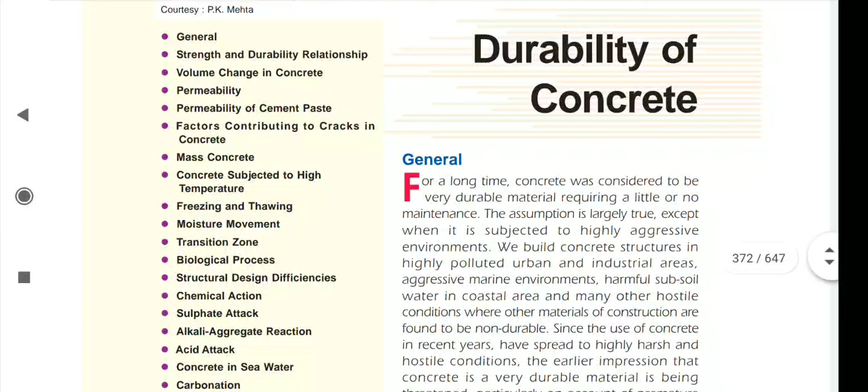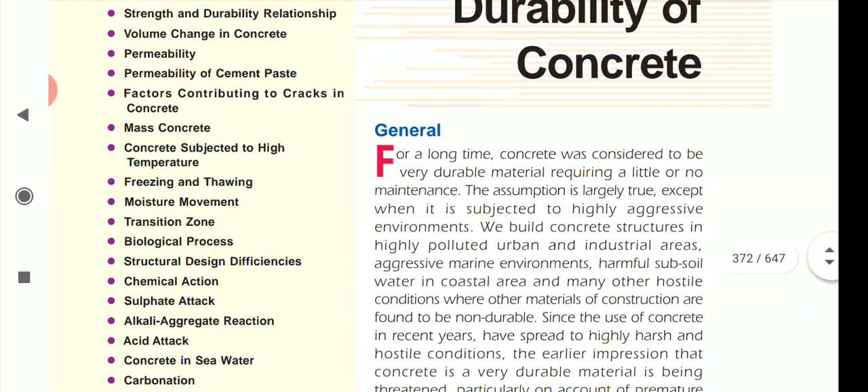Welcome you all for the next session of concrete technology, and that is the durability of concrete. This is from the topic of the third module. We'll study what is meant by durability and what are the factors which are affecting durability.

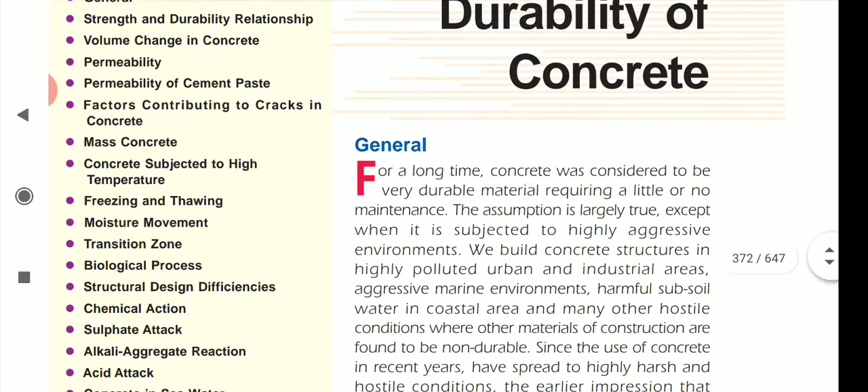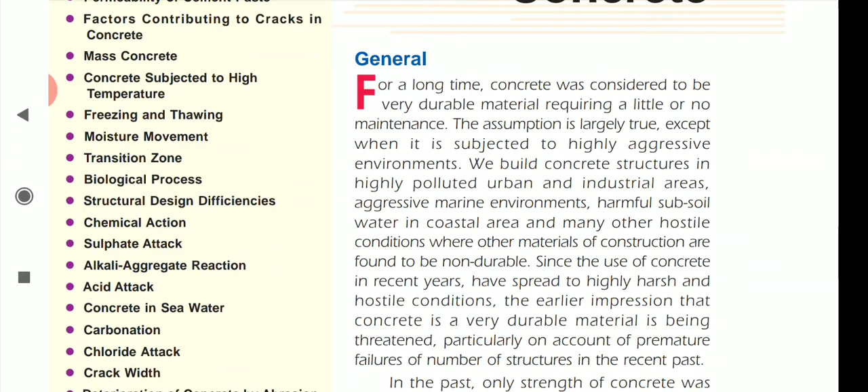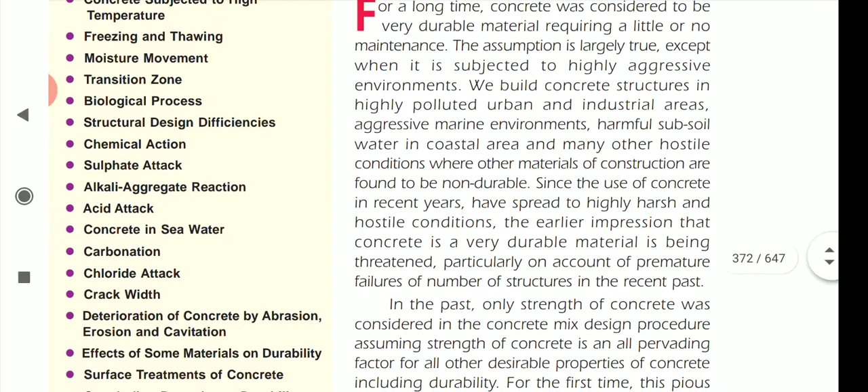For a long time concrete was considered to be a very durable material requiring little or no maintenance. This assumption is largely true except when it is subjected to a highly aggressive environment, such as when we build concrete structures in highly polluted urban and industrial areas, aggressive marine environments, or harmful subsoil water in coastal areas.

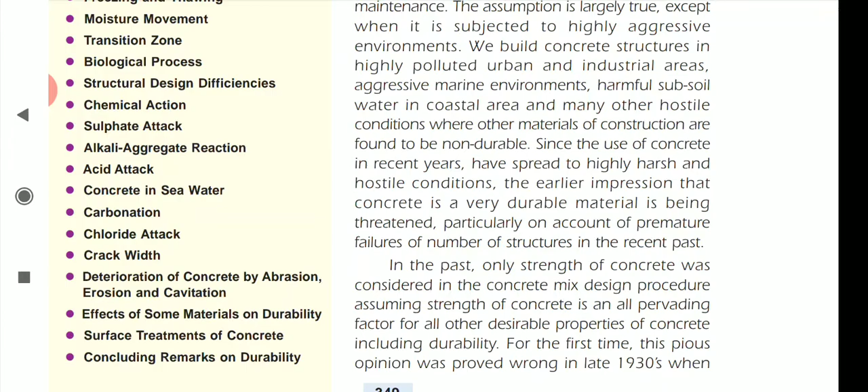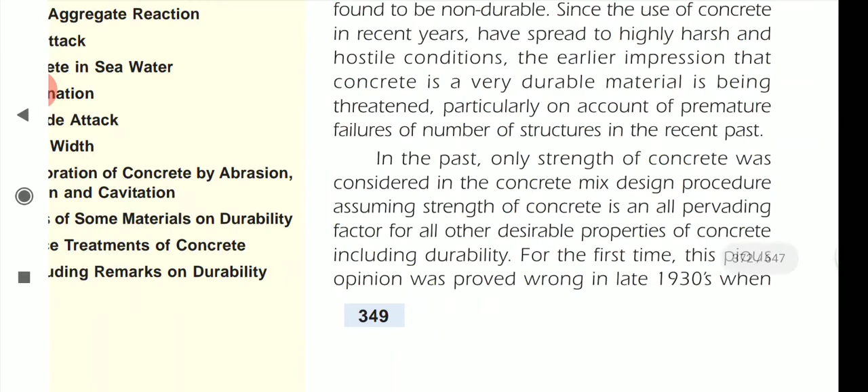Since the use of concrete in recent years has spread to highly harsh and hostile conditions, the earlier impression that concrete is a very durable material is being threatened, particularly on account of premature failure of a number of structures. In the past, only the strength of concrete was considered in the mix design procedure, assuming strength is an all-pervading factor for all other desirable properties, including durability.

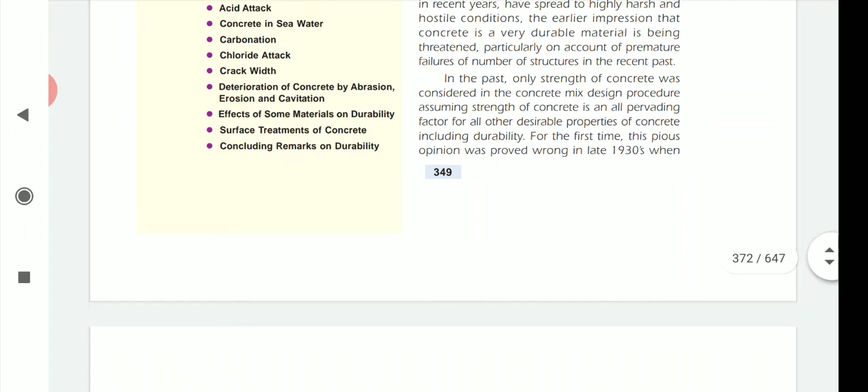This opinion was first proved wrong in the late 1930s when a series of failures of concrete pavements took place due to frost attack. Although compressive strength is a measure of durability to a great extent, it is not entirely true that strong concrete is always durable concrete.

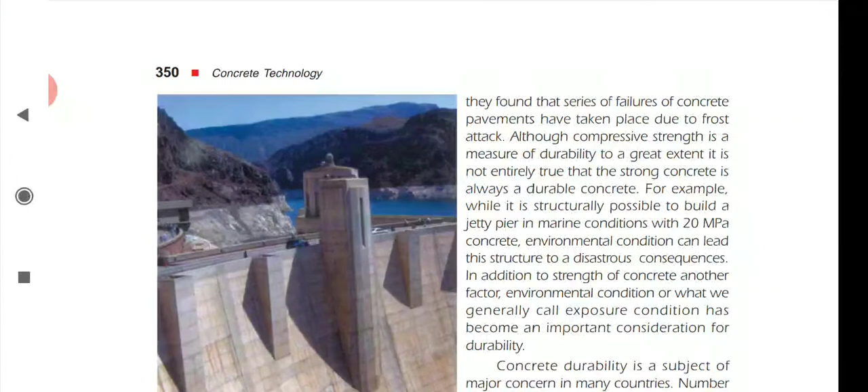For example, while it is structurally possible to build a jetty pier in marine conditions with 20 megapascal concrete, the environmental condition can lead this structure into disastrous consequences. In addition to strength, another factor, the environmental condition or exposure condition, has become an important consideration for durability.

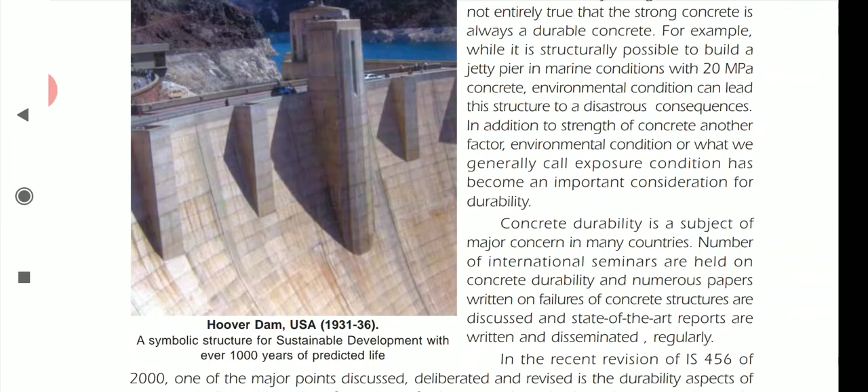In olden days, we considered strength and durability to be the same. If concrete achieved good strength, we would say it is durable concrete. But this is not true. Some environmental conditions, when not favoring the concrete, cause durability to reduce even if it has sufficient strength.

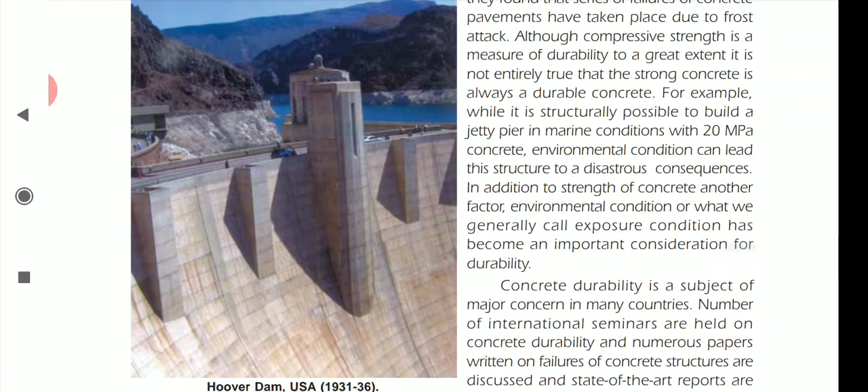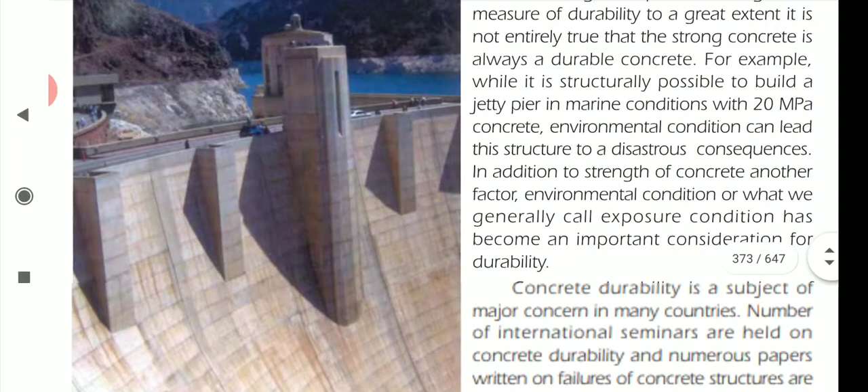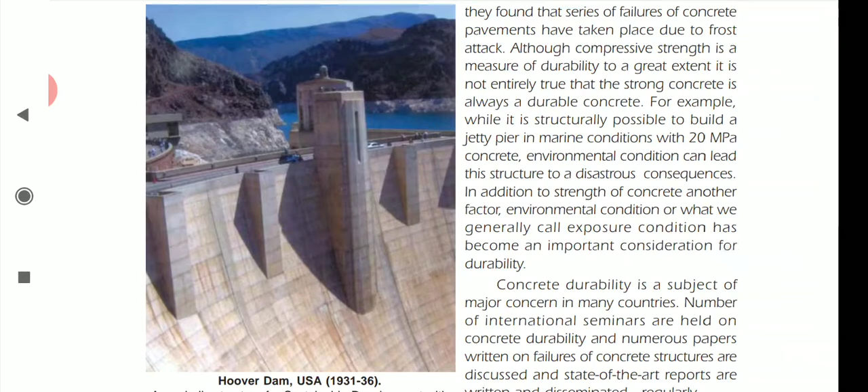The factors affecting durability are different from the factors affecting strength. Concrete having good compressive strength may have less durability. Durability is like the living span of concrete, in normal words, how many days the concrete remains durable - that we need to study.

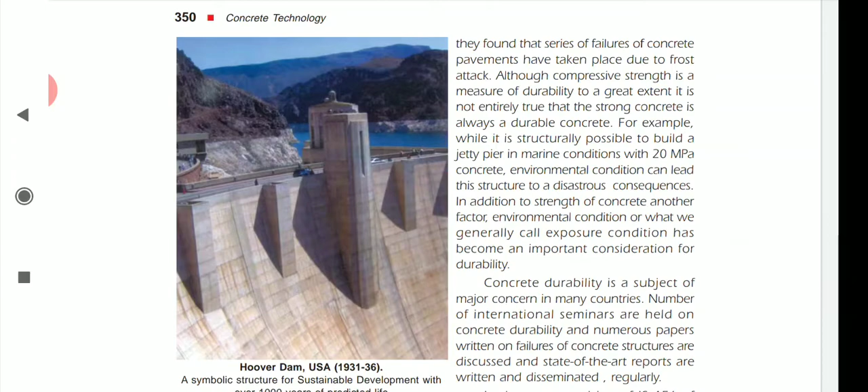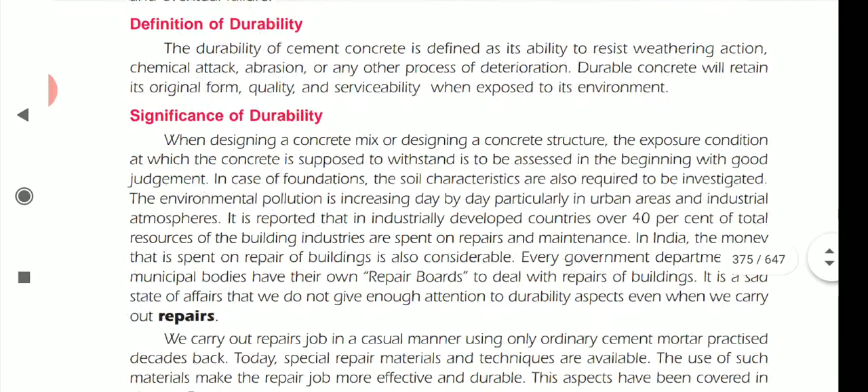So what is the significance of durability, why we need to consider durability in the construction of a concrete structure - that we'll see. That is the definition and significance of durability. The durability of cement concrete is defined as its ability to resist weathering action, chemical attack, abrasion, or any other process of deterioration.

A durable concrete will retain its original form, quality, and serviceability when it is exposed to the environment. Durability is the resistance capacity of concrete, or its ability to resist environmental conditions like chemical attack.

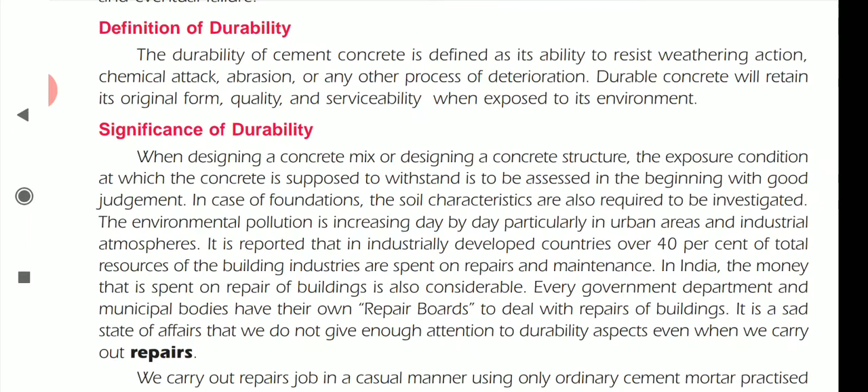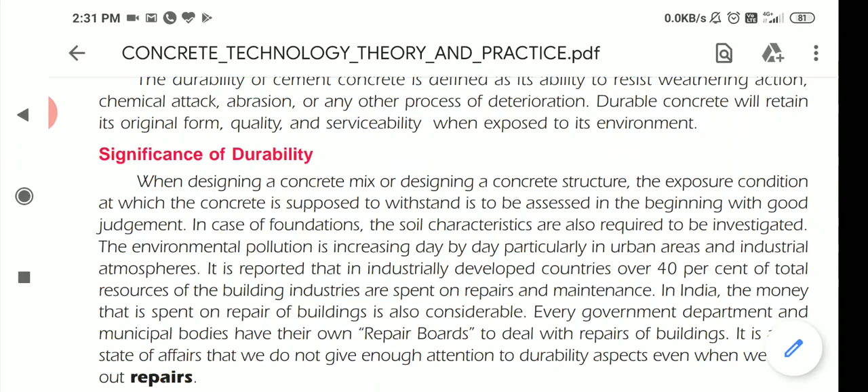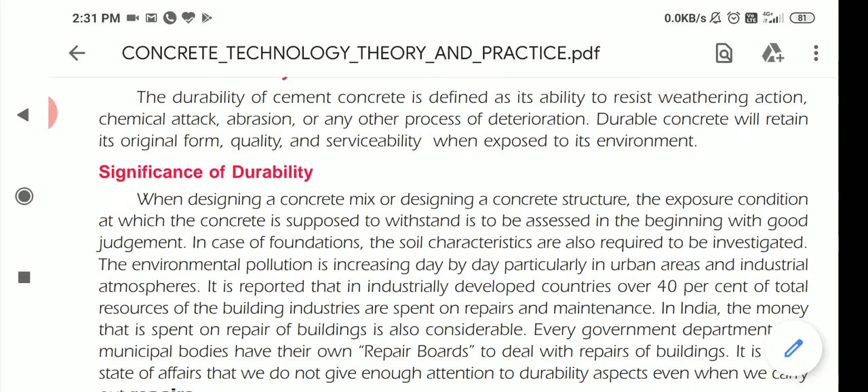Chemical attack comes from environmental pollution, and abrasion is the rubbing action between two items, along with any other process of deterioration. If concrete has resistivity capacity against these factors, then I can call it durable concrete. If concrete fails to resist chemical attack, then I cannot say it is durable. So if you want to say concrete is durable, it should resist natural or environmental effects, and will always retain its original form, quality, and serviceability when exposed to the environment.

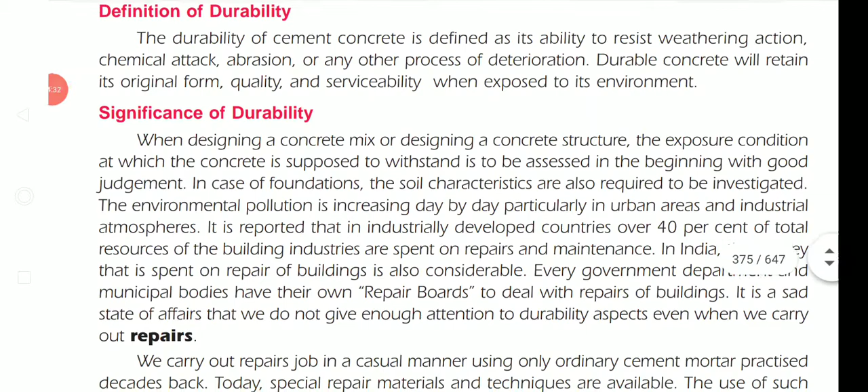What is the significance of durability? Significance means why we need to consider it, what is the importance of durability. When designing a concrete mix or a concrete structure, the exposure condition which the concrete is supposed to withstand must be assessed in the beginning with good judgment. In case of foundations, the soil characteristics are required to be investigated.

The environmental pollution is increasing day by day, particularly in urban areas and in industrial atmosphere.

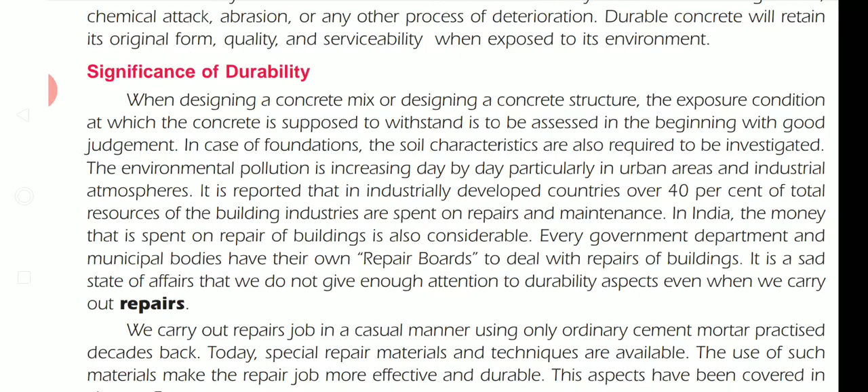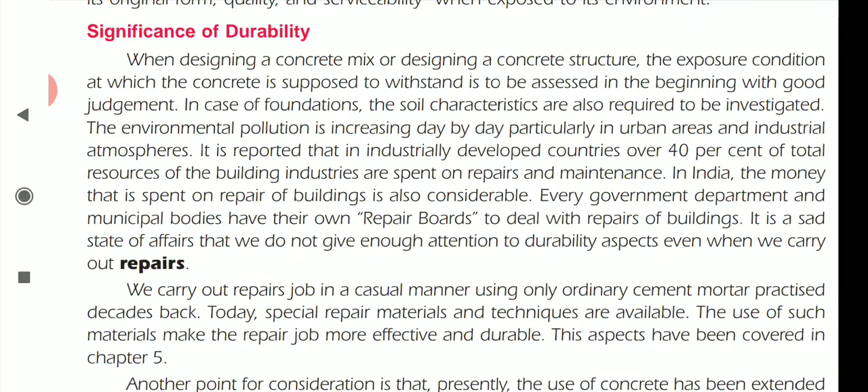It is reported that in industrially developed countries, over 40% of the total resources of the building industries are spent on repairs and maintenance. In India, the money spent on repair of buildings is also considerable. Every government department and municipal body has its own repair boards to deal with repair of buildings. It is a sad state of affairs that we do not give enough attention to durability aspects when we carry out repairs.

We carry out repair jobs in a casual manner using only the ordinary cement mortar practiced from long back. Today, special repair materials and techniques are available. The use of such materials makes the repair job more effective and durable. These aspects have been covered in chapter 5.

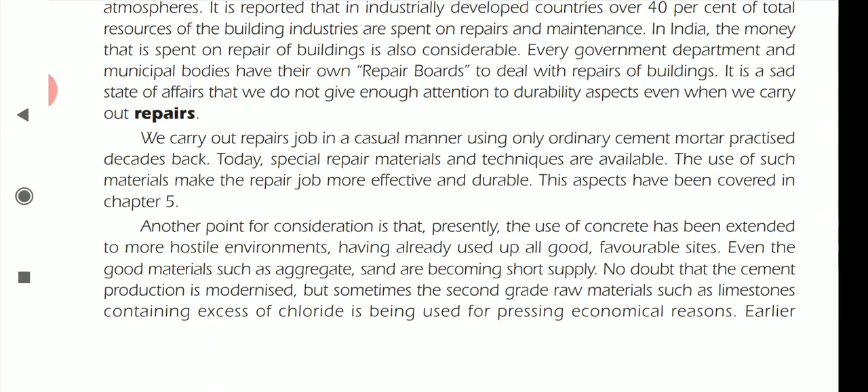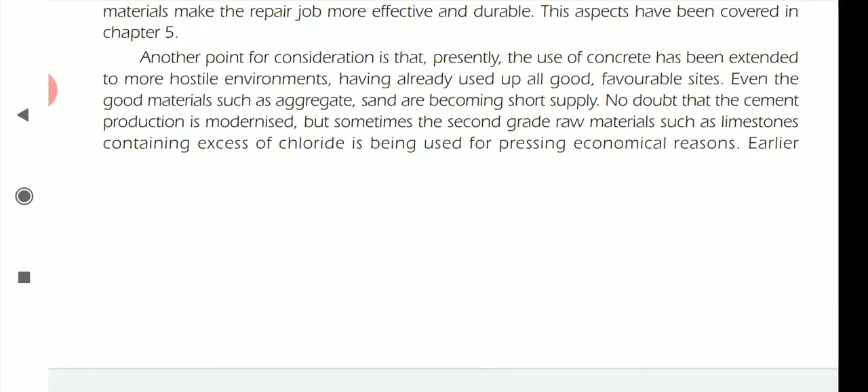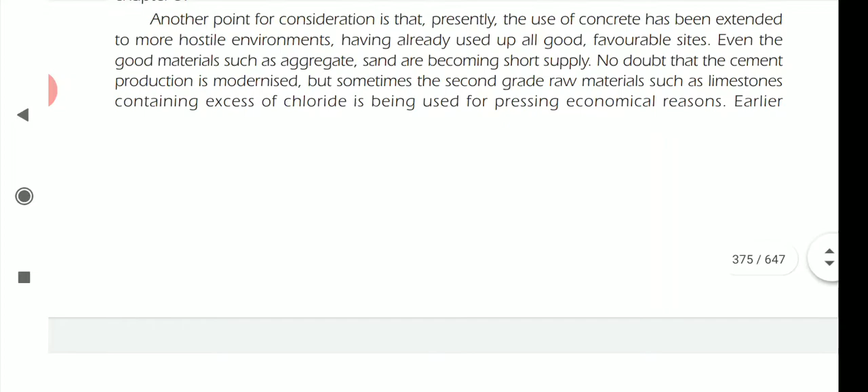Another point of consideration is that presently the use of concrete has been extended to more hostile environments. Having already used up all good favorable sites, even good materials such as aggregate and sand are becoming short in supply. No doubt that cement production is modernized, but sometimes second grade raw materials such as limestone containing excess chloride is being used for economical reasons.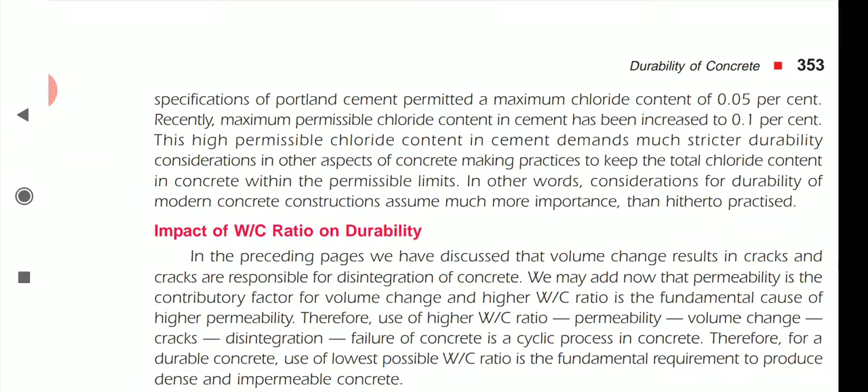Recently, the maximum permissible chloride content in cement has been increased to 0.1%. This high permissible chloride content in cement demands much stricter durability considerations in the other aspects of concrete making practices, to keep the total chloride content in concrete within permissible limits. In other words, consideration for durability of modern concrete construction assumes much more importance than hitherto practiced.

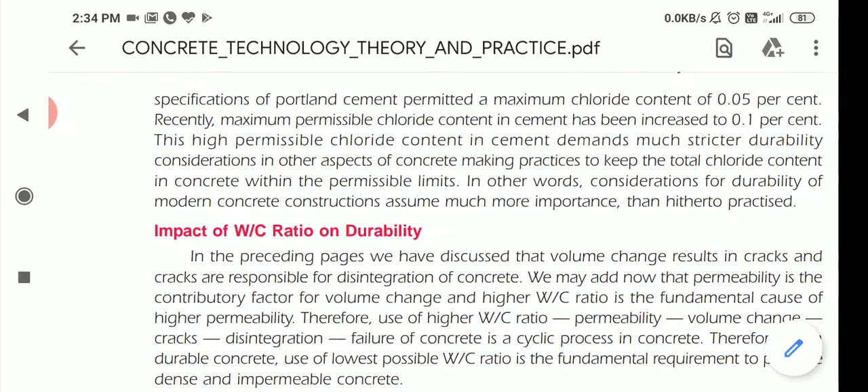So as we know, why we need to consider durability is because the concrete is going to be subjected to different hostile conditions or environments, like industries and different types of environmental pollution. When the chemicals present in that pollution attack the cement, the durability of the concrete reduces. When durability reduces, there is occurrence of cracks and collapse of buildings. So you need to construct buildings that can resist that chemical attack, and then that concrete can be called a durable concrete.

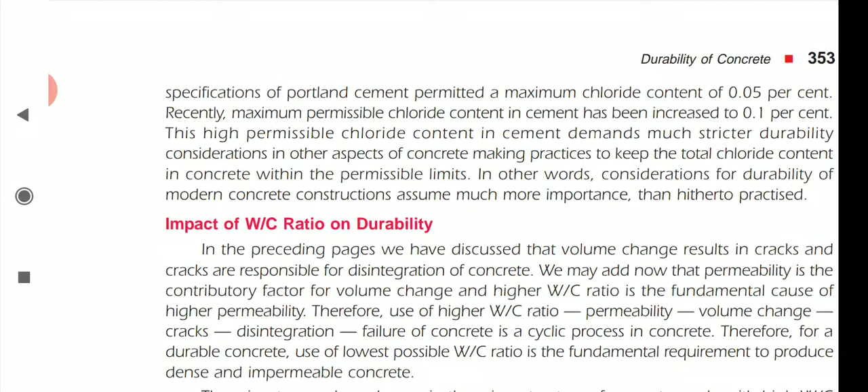So what are the different factors which are affecting this durability? If you want your concrete to be durable for longer days, how do you need to prepare that concrete? What are the factors to be considered while preparing concrete for a durable one?

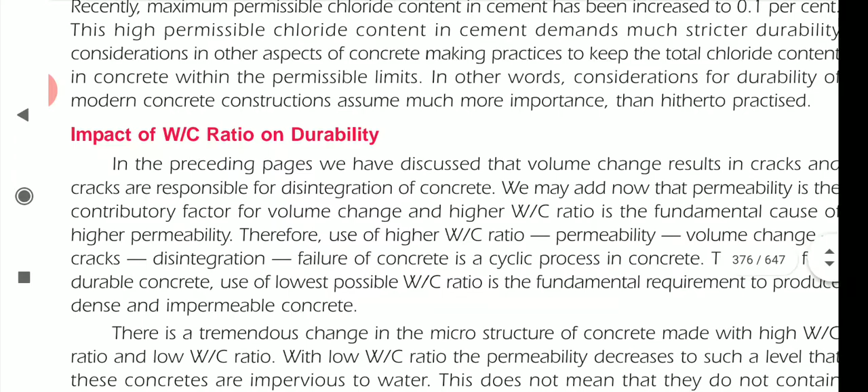The first one is water cement ratio. As we know, the water cement ratio is an important factor for volume change, and higher water cement ratio is the fundamental cause of higher permeability. Yes, true. If the water cement ratio is higher, the permeability will be higher. It will flow faster. Therefore, use of higher water cement ratio causes permeability, and it causes volume change, cracks, disintegration, failure of concrete.

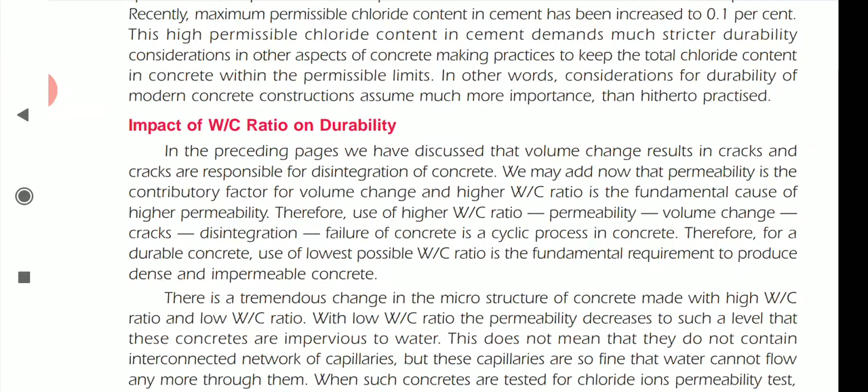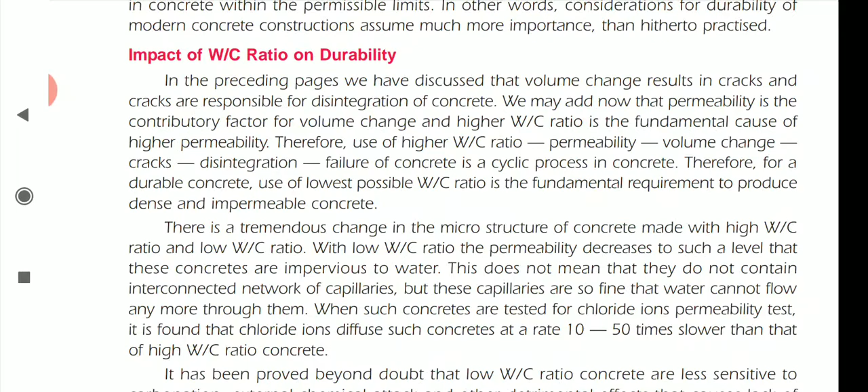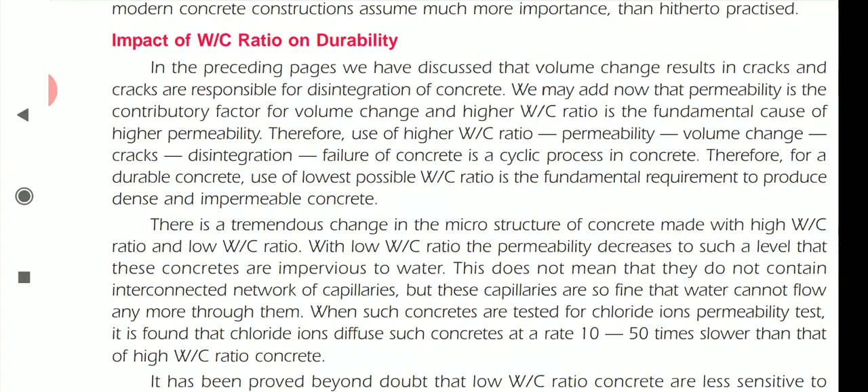It is a cyclic process for durability. Therefore, for durable concrete, use of the lowest water cement ratio is fundamentally required to produce dense and impermeable concrete. So if you want to get dense and durable concrete, the water cement ratio should be less. The more the water cement ratio, the more will be the permeability. The more the permeability, the more will be the volume change, that is shrinkage, which causes cracks. More cracks lead to disintegration and collapse. Hence the durability gets reduced, so you should use a lesser water cement ratio.

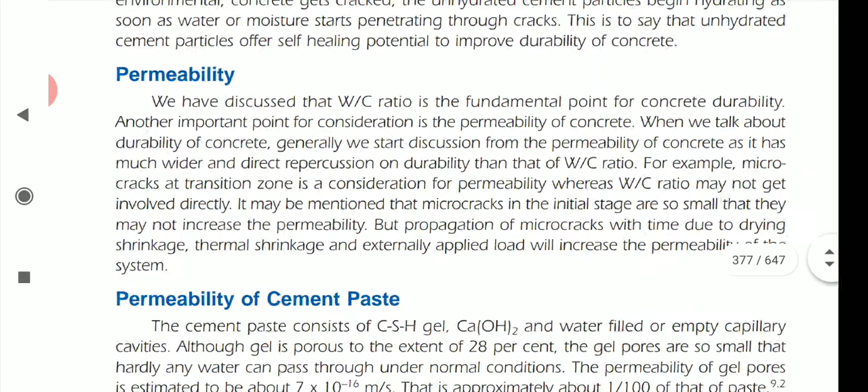Next, the permeability. One more factor is permeability. We have discussed that water cement ratio is a fundamental point for concrete durability. Another important point of consideration is permeability of concrete. When we talk about the durability of concrete, generally we start discussion from permeability of concrete, as it has a much wider and direct repercussion on durability than water cement ratio.

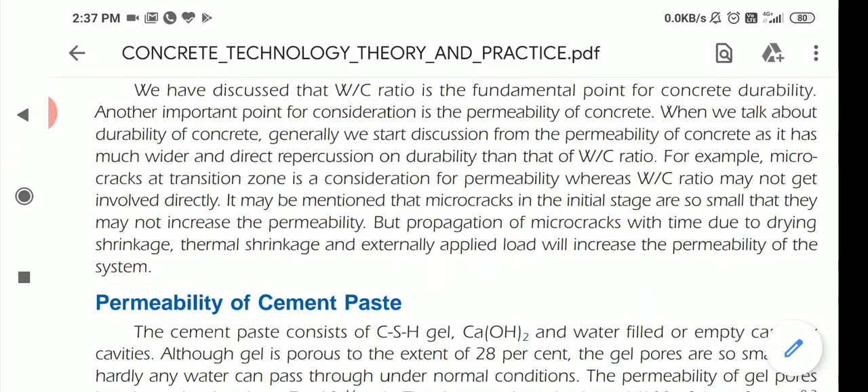For example, the micro cracks at the transition zone are considered for permeability, where water cement ratio may not get involved directly. It may be mentioned that micro cracks in the initial stage are small, so they may not increase the permeability, but propagation of micro cracks with time, due to drying shrinkage, thermal shrinkage and externally applied load, will cause permeability in the system, and this will increase the cracks and reduce durability.

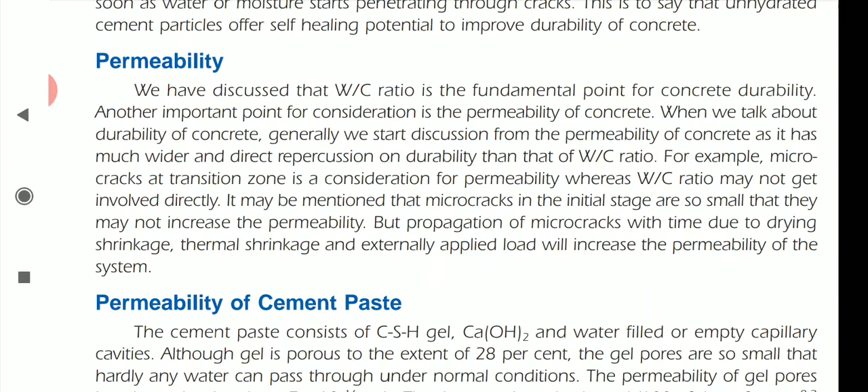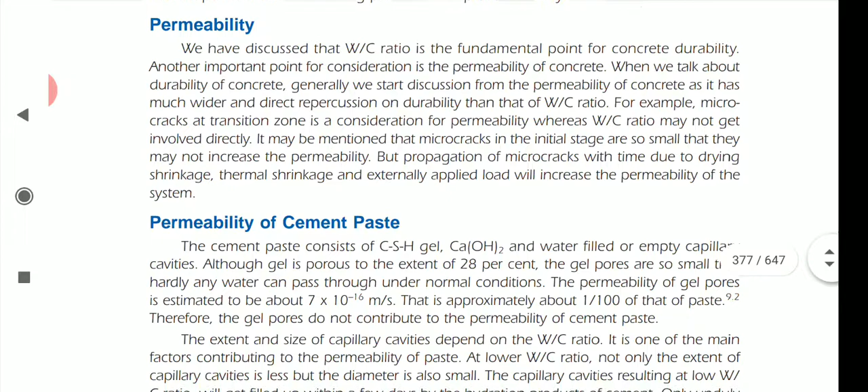So if the concrete is more permeable or more flowable, then the cracks will be more. As time goes on, the normal hair cracks are going to increase and reduce the durability. Hence, the permeability of the cement paste is also a very important factor for durability.

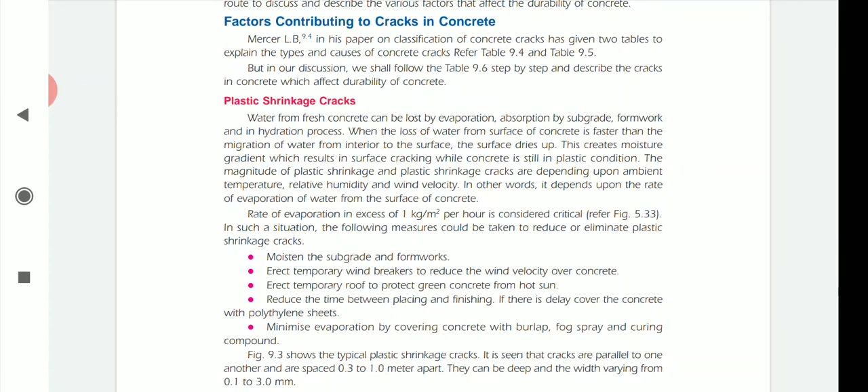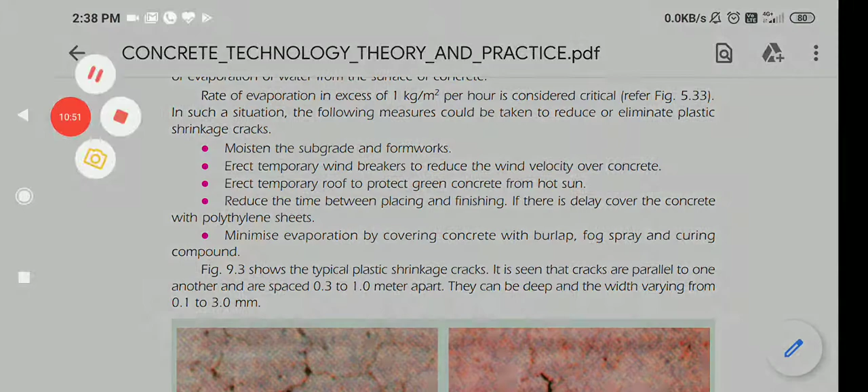Okay, so this is what the durability of concrete is. Very important concept, the durability of concrete. So along with this you need to study cracks also, because cracks occur due to less durability of concrete. So what are these cracks, how do they occur, and what are the factors affecting the cracks, how the cracks will form - that you need to study along with durability of concrete. Okay, so this is regarding the durability of concrete.